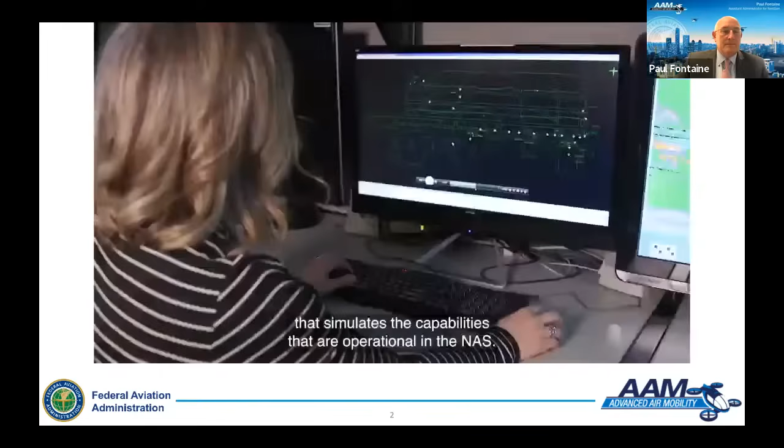Hello, welcome to the Technical Center. Most of the work that we do here requires a laboratory that simulates the capabilities that are operational in the NAS. Our technical staff perform careful and thorough verification and validation efforts to assure changes to the system are operationally suitable and safe before they are deployed.

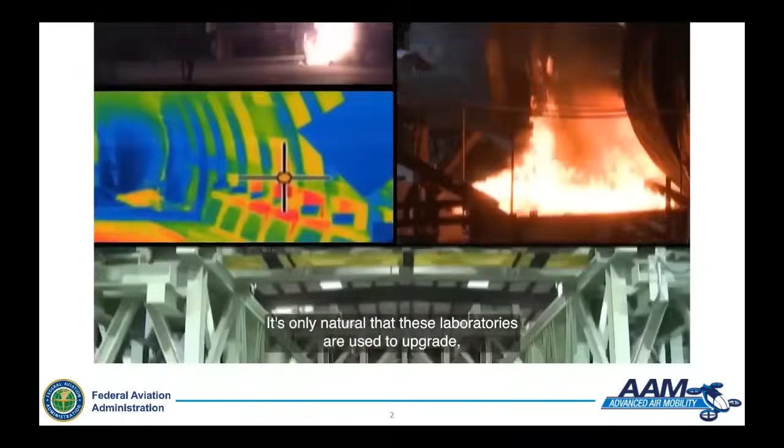It's only natural that these laboratories are used to upgrade, improve, and operationally sustain the national airspace system. The Technical Center cannot do it alone, and our partnerships with industry, academia, government, and international are very important to FAA as well as the Technical Center.

The ATM area simulates en route and terminal domains and includes both existing and future NAS capabilities. This area provides a realistic look, feel, and operation of the en route and terminal automation systems. The NIEC uses a field of displays, keyboards, trackballs, and knobs to immerse the participant into a realistic air traffic environment. This area is integrated with the rest of the lab, making everything interconnected.

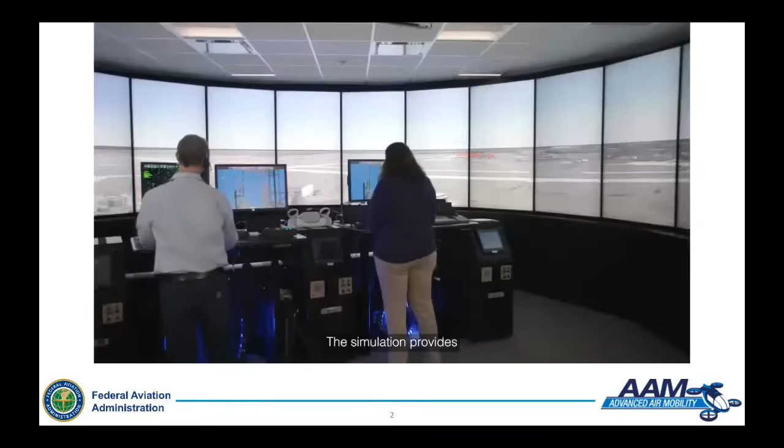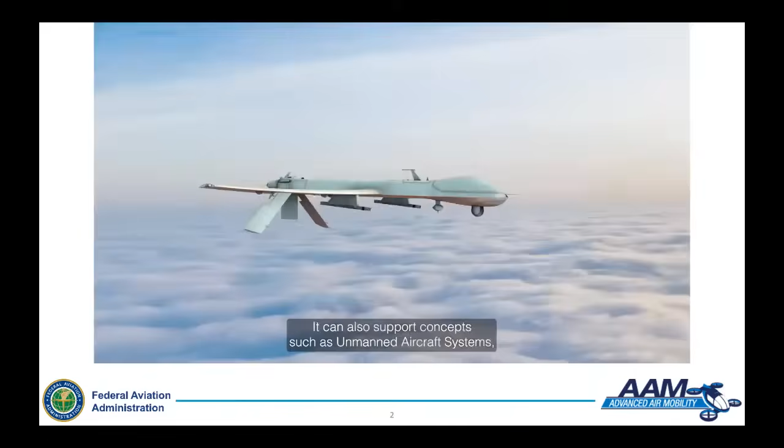The NIEC Tower is an advanced tower simulation system. The simulation provides a 300-degree realistic display of aircraft and airport operations. This system can simulate day and night with various weather conditions such as clouds, rain, or fog. It can also support concepts such as unmanned aircraft systems, advanced air mobility operations, simulated safety alerts, and anomalies such as crashes, runway incursions, flames, and smoke. The out-the-window view currently supports many airports, such as Philadelphia, Denver, and Atlantic City, but can be configured to support any airport as needed.

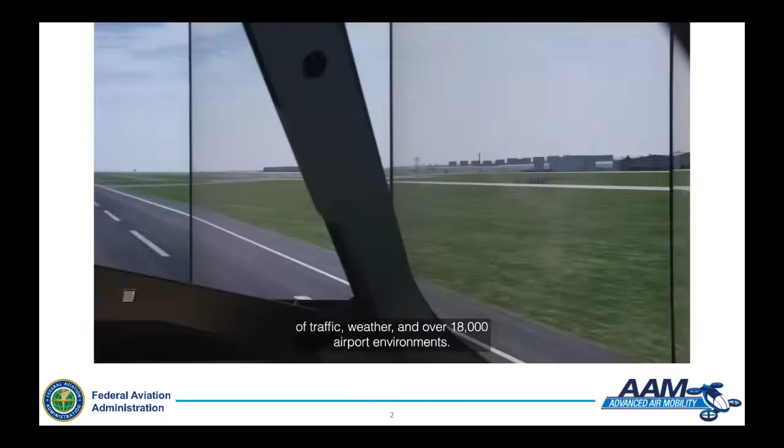The Reconfigurable Cockpit Simulator, RCS, is a full-size, enclosed, configurable, and extendable glass cockpit with a 220-degree out-the-window field of view that provides visualization of traffic, weather, and over 18,000 airport environments. The RCS is built on a high-fidelity aircraft performance model and includes a mix of both tactile controls and display interfaces to provide a rich, simulated environment.

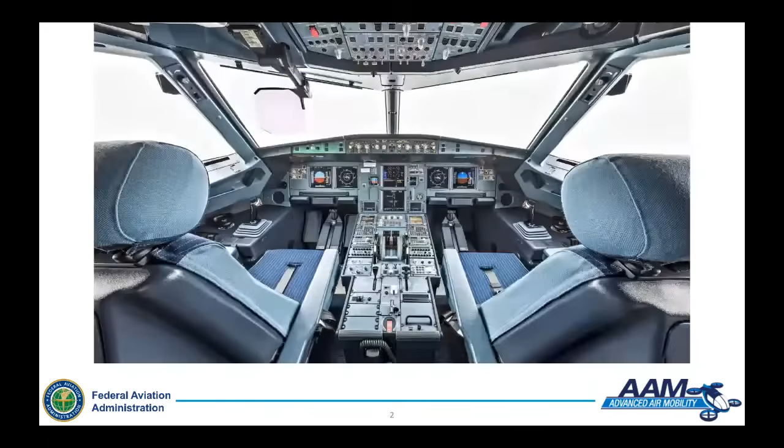The visual system offers highly realistic visuals including dynamic elements such as wind and traffic. It is also possible to add additional features and prototypes for testing, such as an angle of attack indicator. The system is currently configured to be an Airbus A320 and can be viewed as a target on the displays in the tower area and ATM area, seamlessly including it into simulations and demos.

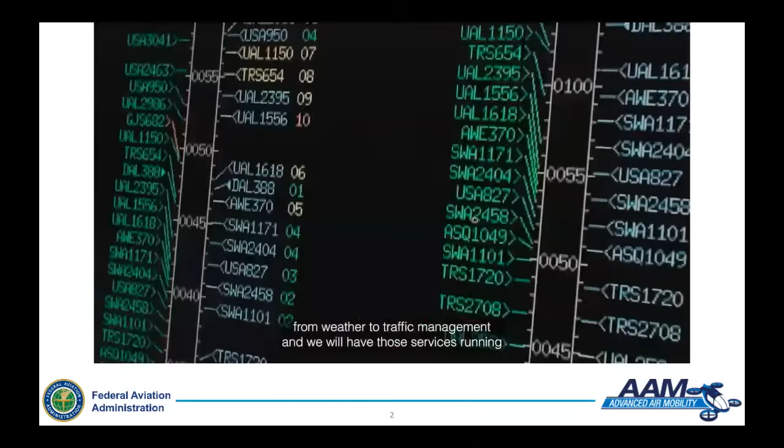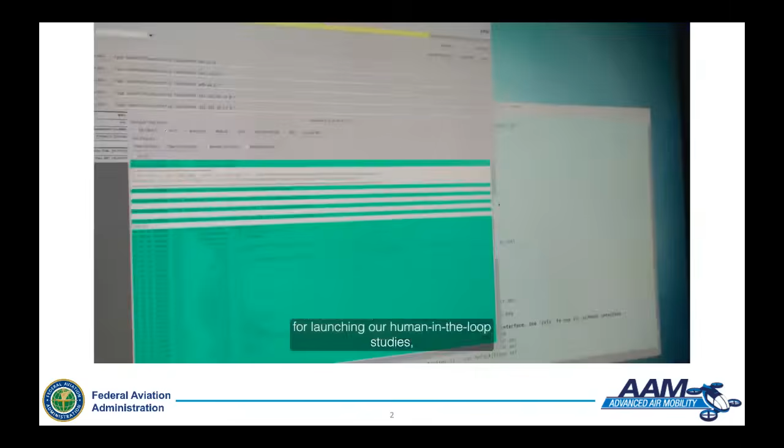The multipurpose area stays true to its name and has many uses in the lab. In this section, we have a multitude of different displays that range from weather to traffic management, and we will have those services running during simulations as needed, as well as displayed for demos and tours. A couple of stations that remain static are used for our simulation control environment, which allows us to have a dedicated location for launching our human-in-the-loop studies, the tower view, our cockpit simulator, as well as other tasks in the lab.

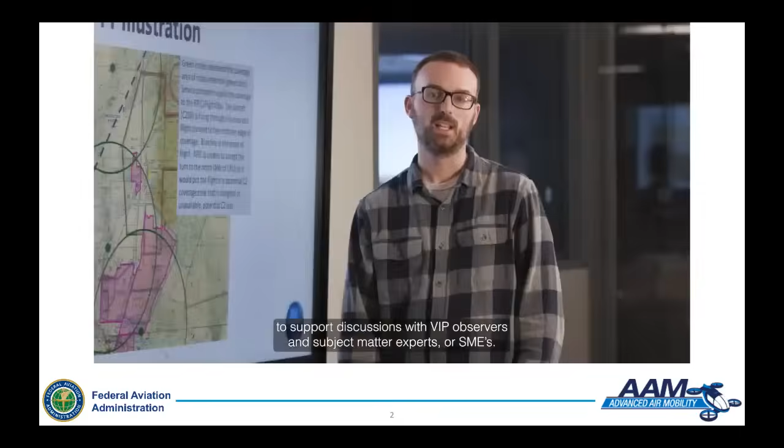The NIAC Display Lab is a separate room within the NIAC that can be used for presentations and briefings before, during, and after simulations to support discussions with VIP observers and subject matter experts, or SMEs. Additionally, the video wall is connected to all NIAC systems, allowing live simulation viewing for guests as well as replay capabilities.

Hopefully, as you can see, using the NIAC lab, we really have a great tool for supporting what AAM will look like and examining the different possibilities of how they will fly. So the team at the Tech Center can really help bring to life operations such as advanced air mobility, and really provide a research environment that brings everyone together in a way that we can discuss solutions in a tangible manner. That's really our goal here.

So we've had an opportunity to run an initial cadre of industry members through the labs at the Tech Center. And we look forward to hosting more events in the future for others that may want to come and see for themselves how we're using these tools. In the meantime, the team is really preparing for some upcoming simulations, first focused on the Los Angeles area. We'll also be conducting a lot more tabletops for additional airports where we expect to see some of those early operations.

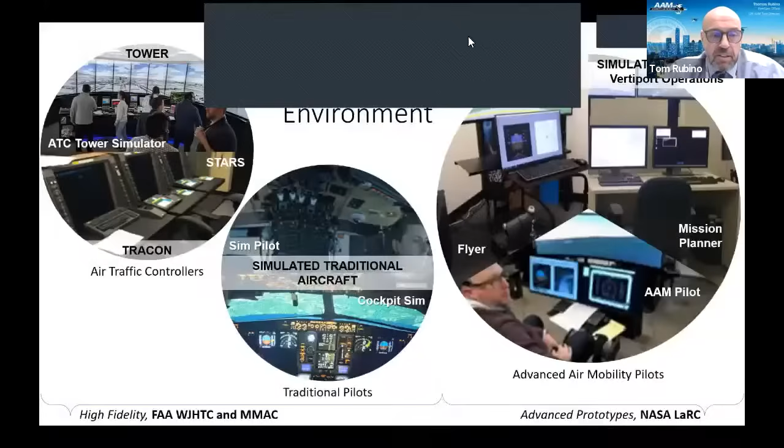Today, my colleagues and I are going to discuss our modeling and simulation efforts in support of Innovate 28, Advanced Air Mobility, AAM. We are using our modeling and sim capabilities at the William J. Hughes Technical Center and with our partners to assess the integration of these new operations into the National Airspace System, the NAS. We call this part of our test and evaluation plan the Airspace Integration Assessment.

We know that industry is very interested in the airport transfer use case. That's flying between downtown of a major city to that city's airport, usually a major airport. And I'm sure some of you have probably wished you could leave the traffic jam you're in and fly over to that airport and get there quickly. Well, that's what we're trying to make happen, and we're trying to make it happen in the near future. But it is complicated. This involves complex airspace with many rules, regulations, and safety concerns that all need to be considered and worked through. So in order to effectively assess these things, we created an integrated environment.

On this slide, we have the key components laid out. Starting on the left, we have the FAA's high fidelity systems that represent the NAS. This includes our terminal automation system, and it's the real system that is in the field.

We have it in our simulation environment. It also includes an air traffic control tower simulation lab with voice communications and other tools that controllers expect to have. Not really shown here, but very important, is our high fidelity simulation engine and infrastructure that makes it all possible.

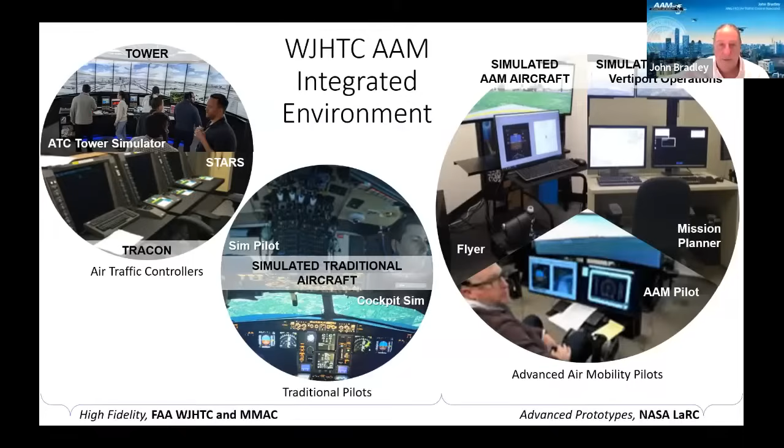The one thing that we like about that specifically is the TCAS capability that our pseudo-pilot stations do not have. So when we have these aircraft, these new entrants, advanced air mobility, flying potential ingress and egress routes in and out of LAX, having this capability to see if we are generating potential TCAS alerts is something that is of interest.

The right-hand side is basically showing some of our colleagues at NASA Langley Research Center, their capabilities there. So in our environment, during our scenarios, all the advanced air mobility aircraft are being flown by NASA Langley, either in their cockpit simulator, which they have named a Flyer.

You can see the person on the bottom is actually in one of the simulators. It has a flight control panel there, as well as an out-of-the-cockpit view. They have two of these Flyer simulators that they fly in the environment, as well as several pseudo-pilot stations, keyboard pilots in this environment.

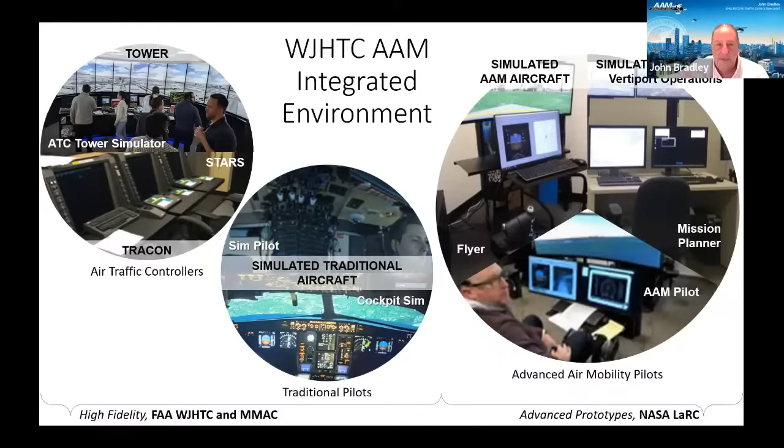Before I go to the next slide, I'm going to show you a short video of a scenario, a human-in-the-loop scenario that took place. It was a dry run for LAX. The female voice is a controller at LA Control Tower, working the helicopter position, basically the advanced air mobility aircraft in this scenario. It's a short clip. You're going to hear some pilots get delayed for departures off the North Complex runways, and some aircraft holding for the eVTOLs to depart. I'll just let the clip play and explain itself.

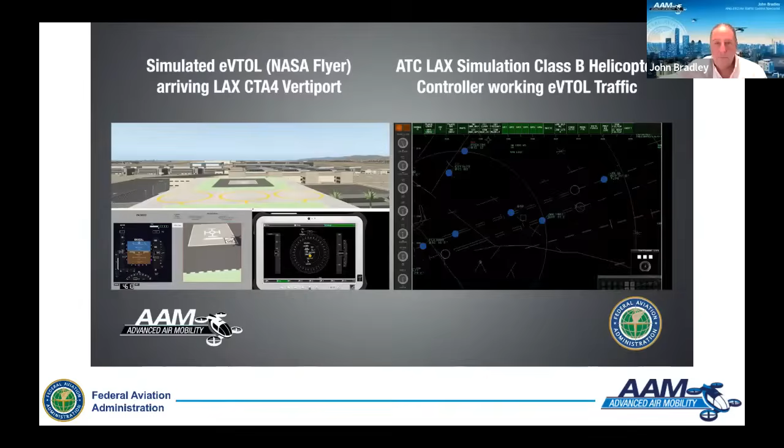City 9104, airborne, passing 300. City 9104, roger, traffic will be holding position 24 left. City 9104, roger. Tower, City 4513, ready for departure, pattern 2, information alpha. City 4513, LA Tower, roger, hold position for traffic departing 24 left. Hold position, City 4513. LA Tower, Pacific 6704, inbound, Sepulveda with alpha. Pacific 6704, LA Tower, proceed inbound. Proceed inbound, Pacific 6704.

Okay, so that's the short clip. You can hear the exchanges taking place between pilot and controller. One of the nice things about our capability is we record everything, so we can go back and play back scenarios, hear the exchange, and we're collecting a lot of data and metrics with the simulation. If we want to go back and look at how many transmissions took place in each scenario, the length of transmissions, we have a suite of tools to do data reduction and analysis on specific metrics.

I'll just point out that the alarm you were hearing in that short clip was because a couple of AAM aircraft had departed the airport and were in the en route phase north of the airport. It was a conflict alert that went off, a STARS conflict alert. It's something that was sort of outside the environment as far as directly at the airport, but it is a capability we want to have, and that is of interest to us. So that's what it sounded like.

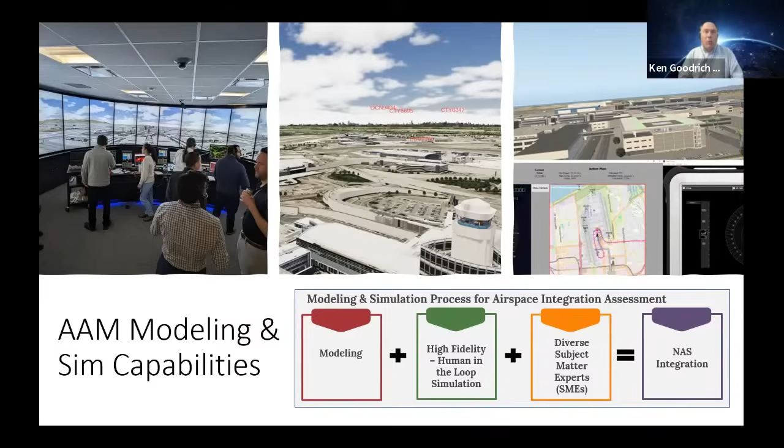I am the Deputy Project Manager for Technology of the Air Mobility Pathfinders project. It's one of several projects at NASA that have significant content focused on advanced air mobility. Let me just briefly run through some of the other projects.

First one is our RVLT, or Revolutionary Vertical Lift Technology Project. It is focused on the development of vehicle technologies with particular emphasis on things like vehicle noise and community acceptance, aircraft safety, including things like crashworthiness and reliability of the distributed electric propulsion systems, as well as advanced design tools to help aircraft developers be more efficient in the development of these advanced concepts.

The other projects that I'm about to mention are all under the Airspace Operations and Safety Program, which tends to be NASA's program that has most contribution to airspace integration and works closely with the FAA. So the projects here include the System-Wide Safety project, which focuses on design and operational safety research with emphasis in the areas of advanced assurance methods for emerging complex systems, things like machine learning and artificial intelligence. It also has a project area looking at in-time aviation safety management systems to be able to take advantage of our increasingly networked and data-rich environments to help improve aviation safety.

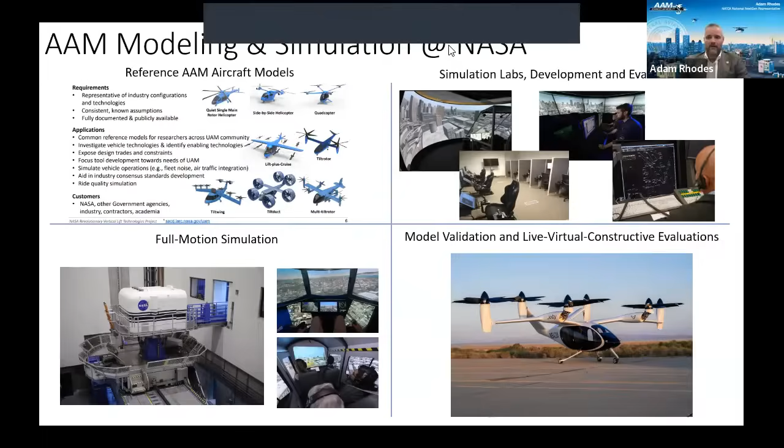We're able to take OEMs and actually put their specific aircraft into the simulator. We're able to take existing airframes, as they spoke about earlier, Airbus and Boeing airframes, and put those into the simulator and interact with these new modes of transportation that we're trying to introduce. So the capability there alone is incredible, and it uses the systems we use today, the software and the hardware. There is no higher fidelity place where we can operate that.

Just in closing, the National Air Traffic Controllers Association embraces the challenge, and we are excited to integrate these new technologies. They'll enhance the working conditions of our members, and will also uphold the safety of the NAS like we always have. We encourage OEMs, airports, the FAA, and other industry partners to bring your ideas, but also be open to other ideas and interests, and understand our workforce will do whatever we can to find solutions that are safe in the NAS.

That's what we do. We do that every day. We're pretty good at it. So we take a lot of pride again in upholding that level of safety that our customers, the public, deserve when they're flying. We appreciate our partnership with the FAA in doing so, and I will turn it over.